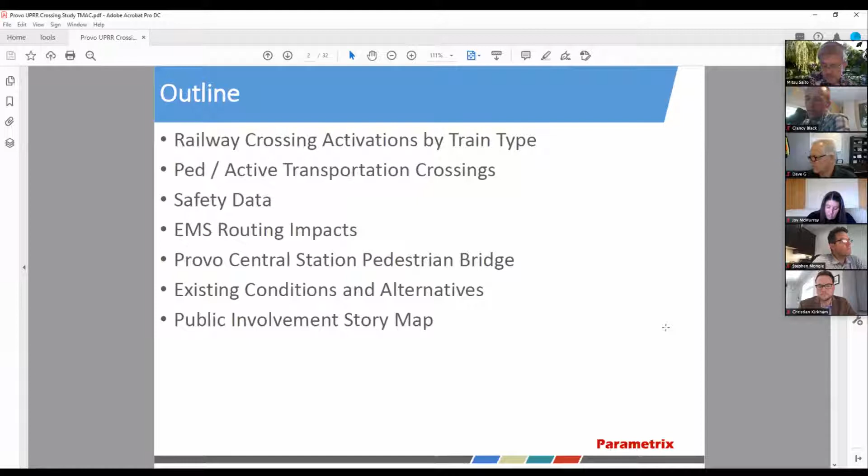So what we're going to do here is turn the time over to Christian Kirkham to talk about the next 6 slides.

Great, thank you, Vern. Good afternoon, everyone. My name is Christian, I'm a planner with Parametrix. I do a lot of GIS analysis. My role on this project was to analyze the observational data at this particular crossing.

So we were looking at Freedom Boulevard and roughly 600 South, right at the railroad crossing, over the course of a little less than a week, but at 2 different months. One set of observations was in August 2019, right before school was in session. The second was in September 2019, right after BYU had started. We wanted to capture both before and after, since there's obviously different traffic and pedestrian patterns that emerge once school has started.

So this first slide we're looking at, we tallied up the number of railway activations - that's when the crossing arms come down. We wanted to get a sense of how many times a day, on average, those crossings were activated. The pie chart on your left, in blue, shows that UTA - the front runner trains - take up the vast majority of activations. Front runner crosses frequently during the day. Next up was the freight trains, and then Amtrak passenger rail made up the smallest percentage.

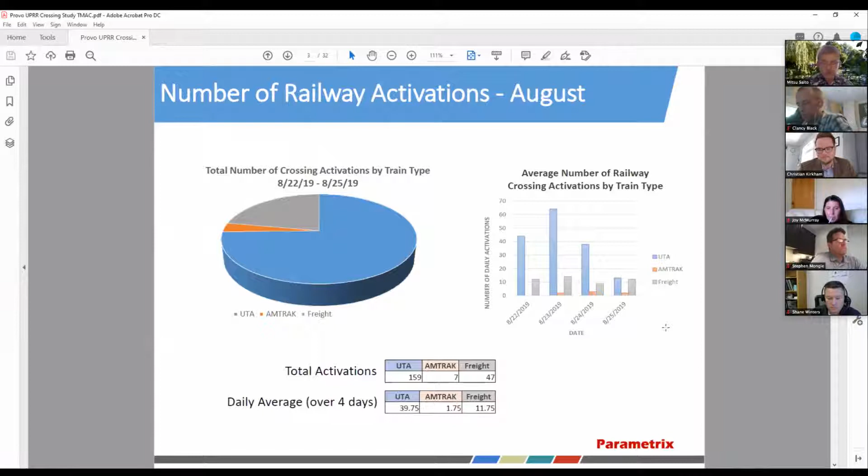Okay, so for September, you can see the breakdown is very similar as far as which type of train was activating the most - UTA front runner by far the most. Our study period in September started on a Wednesday, the 4th, the day after school began. On the bar chart, Wednesday, Thursday, Friday show quite a few activations, and then it dips. On Sunday, the 8th, there are very few activations since front runner doesn't run on Sunday. But overall a very similar breakdown as far as numbers - I don't think the scheduling changes very much, just a slight increase after school had begun.

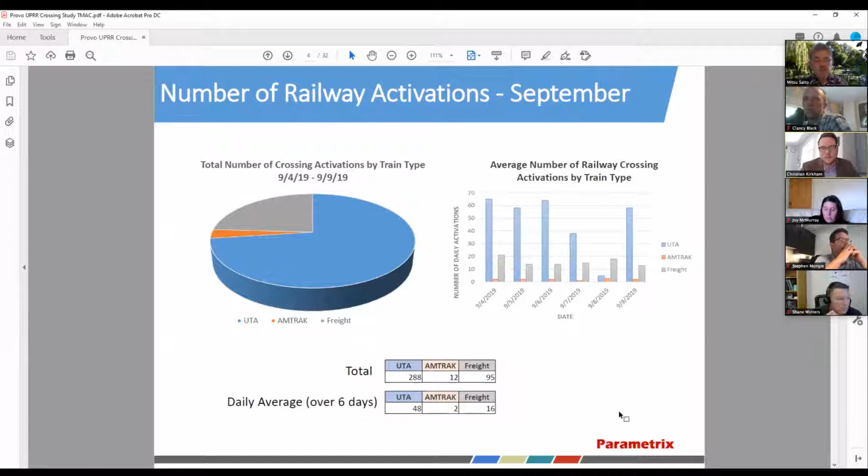Okay, now this shows a different picture - the amount of time those arms are down, by train type. So we saw front runner was frequent, but the activations were pretty brief. The front runner trains that cross are fairly short trains, and then they're done.

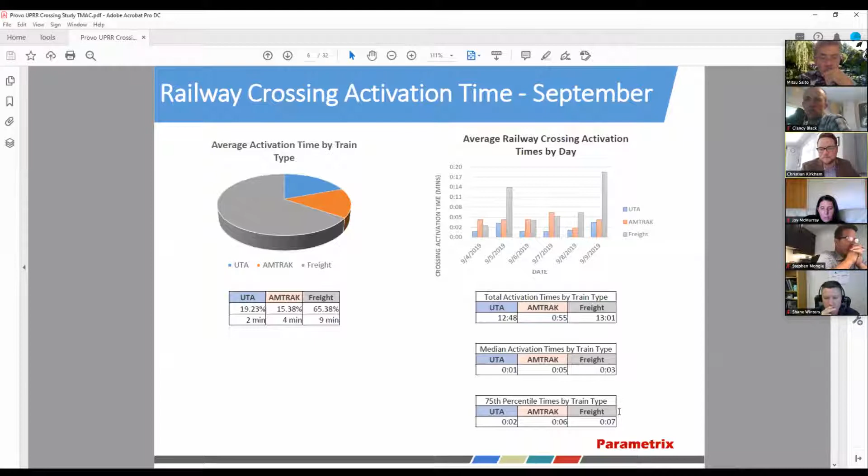Another important part of the equation is pedestrian and bicyclist traffic. Using that same camera and same observational periods, we looked at the number of passengers going to and from the train platform, crossing those crossing arms, and bicyclists. It was no surprise that pedestrians far outnumber the cyclists. We also counted electronic scooters, skateboarders, and people using other modes of transportation. Roughly a third more pedestrians were observed than those cycling.

We observed the peak hours where the largest number of people were crossing. During the weekday, those tended to be the afternoon, the PM peak of 5 to 6 p.m. On the weekends, that would change from early afternoon—we see on the 24th that afternoon seemed to be the peak, on that Saturday.

Keep going, Vern. Christian, could we go back for just a second? Sure, yeah. Please, stop me with any questions.

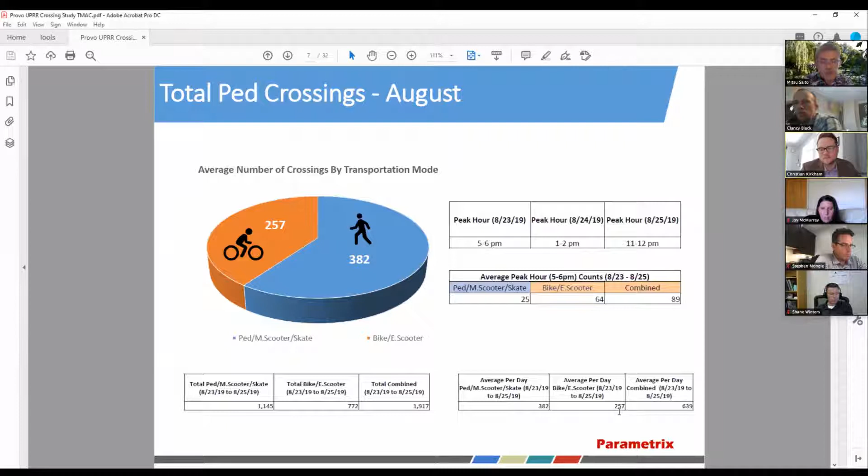After school was in session, the numbers increase, but the breakdown relatively stays the same. You can see September 4th through the 6th, that's during the week, the peak hour was always 5 to 6 p.m. That changes a little bit over the weekend, but we can expect the peak hour for weekday pedestrian and bicyclist traffic to be that afternoon peak.

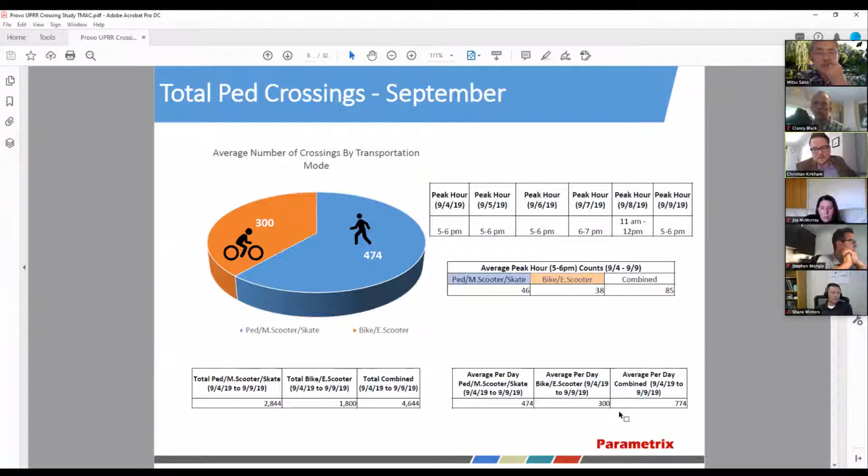I think that's it. Want to go ahead one more, Vern? Yeah, I think this was your...

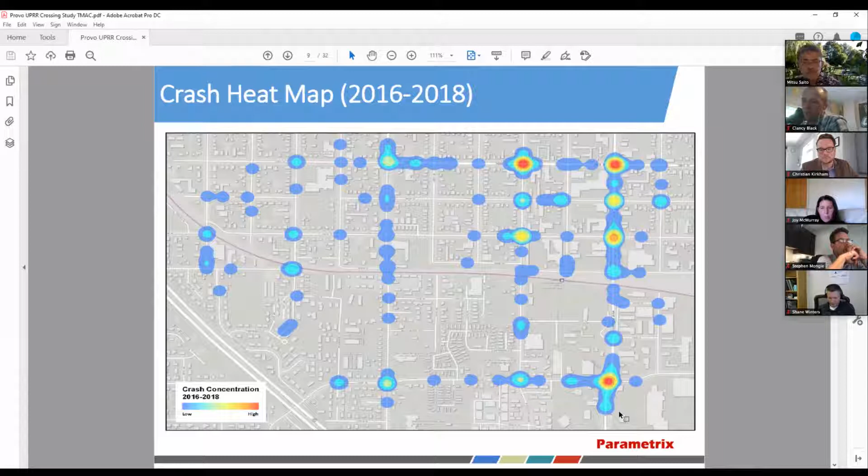This does not include vehicle-train collisions or train-pedestrian collisions—that's a different story altogether. You'll see that our crash severity in the area is pretty low, in the sense that we have a lot of no-injury crashes. We have some minor, and we have a fatal. In fact, on the next couple slides you'll see we had a fatal bicyclist incident as well. That's just tragic—these fatalities in an area spread throughout the community, and people know the person. It's not just a number, and I think that's what we need to understand.

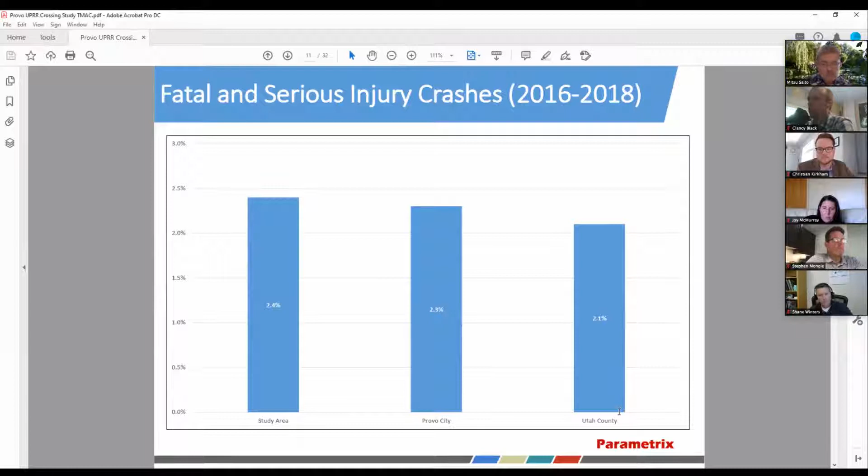We took the crash rate in the area and compared it to Provo City and Utah County in general. It's not a surprise that in the study area, with 2 or 3 major streets like 3rd South, University Avenue, and Freedom Boulevard, we might have just a hair higher crash rate compared to the overall city or county.

Here are our fatal and serious injury crashes. I'm using my mouse down here on 920 South, circling the red one there—that was a bicyclist fatality incident. I don't know the particulars on that.

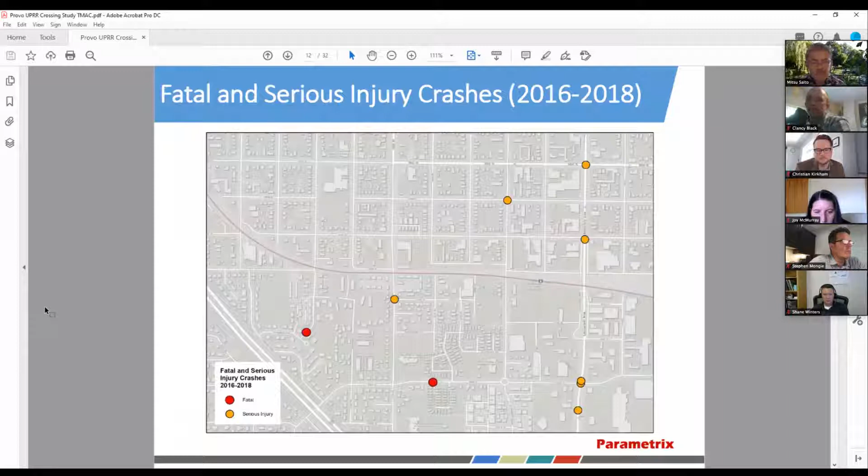Here you can see the bike ped crashes. This was all crashes, all fatal and serious injury crashes for the 3 years. And then here's the bike ped crashes only.

This helps the city and helps us take a look at, well, there's not a lot of crashes at the crossings per se, but we get a lot of crashes when it comes to bike ped at intersections. Intersections is usually the key, and there's just so much going on at the intersections.

We continually ask ourselves, what is a better design? What is causing it, what is the root of these incidents? A lot of times, as Clancy would know, 94 or 96% of all collisions are due to driver error, not roadway design.

So it's unfortunate, but what can we do to design things safer, to force people, if you will, to pay attention? And it's hard. Front Runner and railroads try to do that with the maze before you cross the crossing, and we get them walking each direction down the track, but they're not looking down the tracks, they're looking down at their phone.

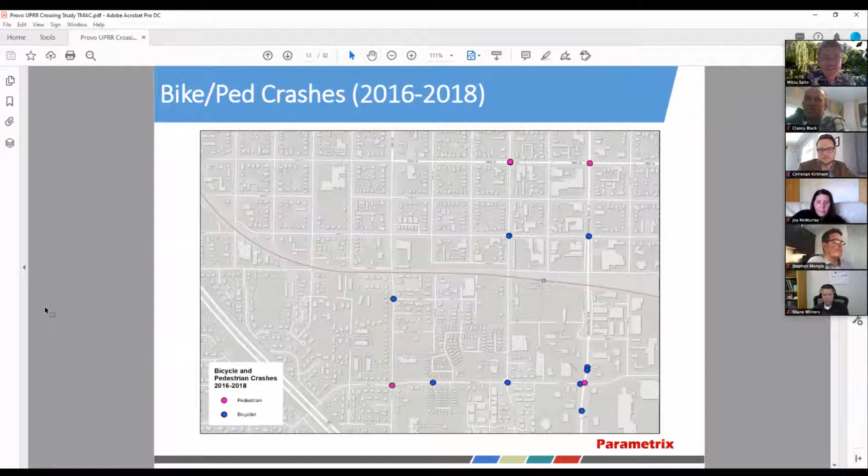So that's our safety information. Any comments or questions on safety before we move on to emergency service routing?

We picked 2 locations to look at emergency service responses and routing. We picked Franklin Elementary School, located north of the railroad corridor, and Franklin Park, south of the railroad corridor, where a lot of activity goes on, including a couple of soccer fields. We wanted to provide a sample of response times to both locations to get an idea of the impact of activations.

The red lines you're going to see are the ones that have an activation that has occurred, and the blue line is their normal route to it, where there's no activation occurring.

We spoke with all 5 fire and rescue stations and interviewed firefighters on that particular shift, and really got some great information from them.

Fire Station 4 is the primary response fire station for this locale, which was a little bit surprising to me, considering it's west of I-15. But that's what it is. Fire Station 4 is located at 2050 West, just south of Center Street, which is the extension of Geneva Road.

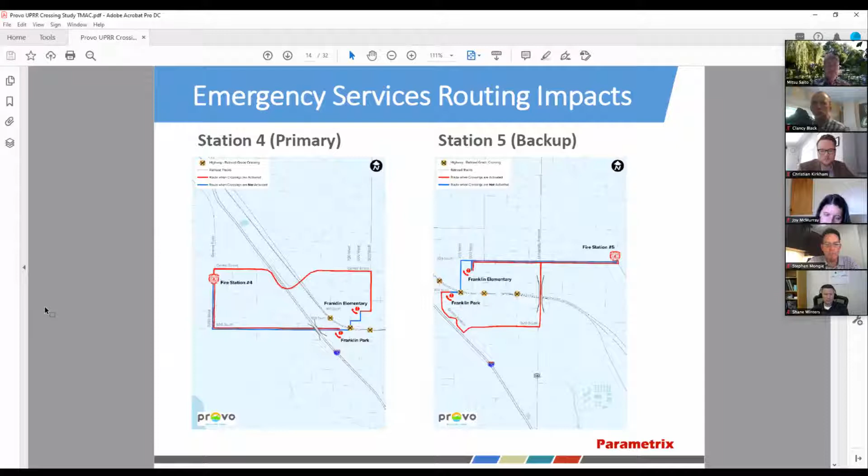Franklin Elementary, of course, is very easy to access. We also looked at Station 1, up where Robert is sitting, and stations 2 and 3. Station 2 is up on Canyon Road, and Station 3 is just off of Columbia Lane. We looked at response times for all of these.

At the end of the day, when there's an activation, you could see stations prolonged in their timing to respond to a call anywhere from 30 seconds to 5.5 minutes longer. That's pretty important when you're dealing with minutes, and you're talking 3, 4, or 5.5 minutes longer for an ambulance or fire truck to respond to an incident. That's kind of impactful in my mind on these activations. Pretty impactful, actually.

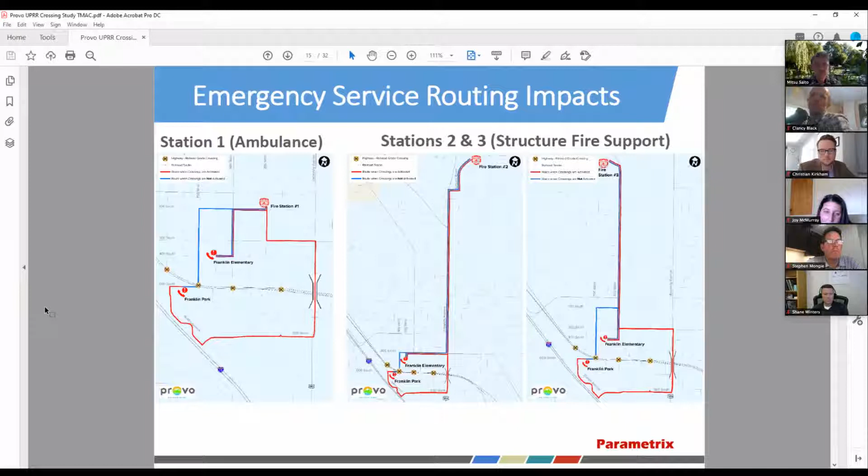So in all, when we look at Franklin Elementary, station 4 is the primary, and 5 is the backup. Station 3 can actually get there faster depending on traffic signals and whatnot. We did a comparison of 5 p.m. and 5 a.m. 5 a.m. is kind of the free flow traffic conditions where you really don't have much backup at all, and you can get there. 5 p.m. is peak hour traffic, of course. So Franklin Elementary is one of those that is not a huge concern.

Detours can take two-thirds of a mile and on average 2.5 to almost 3 minutes longer, depending on the station. Backup from stations 1, 2, 3, and 5 are delayed anywhere from 2.5 to 5.5 minutes, depending on the routes they take. We compared no congestion with congestion, and that's how we came up with this delay.

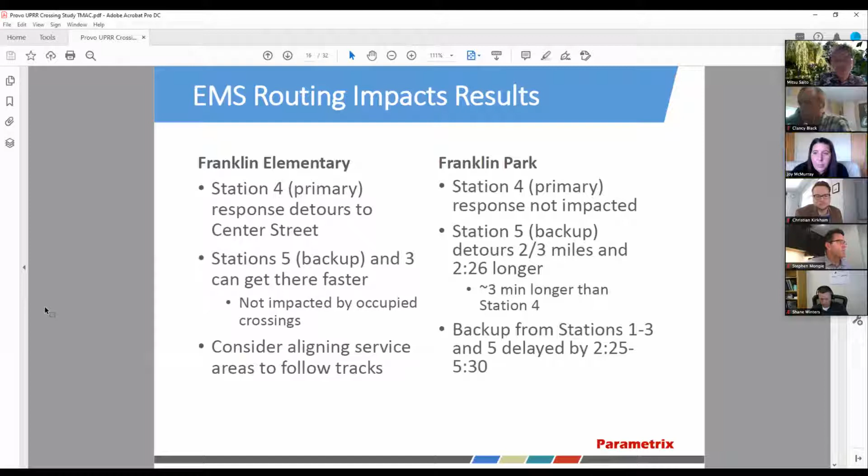Yeah, thanks, Vern. I have a question. Did you say the firefighters have a way of knowing when there's an activation happening? Do they have a camera there, or do they not know until they show up? Yeah, you're correct, they don't know until they show up. They have no idea if a train's going to be blocking their crossing right when they're called out.

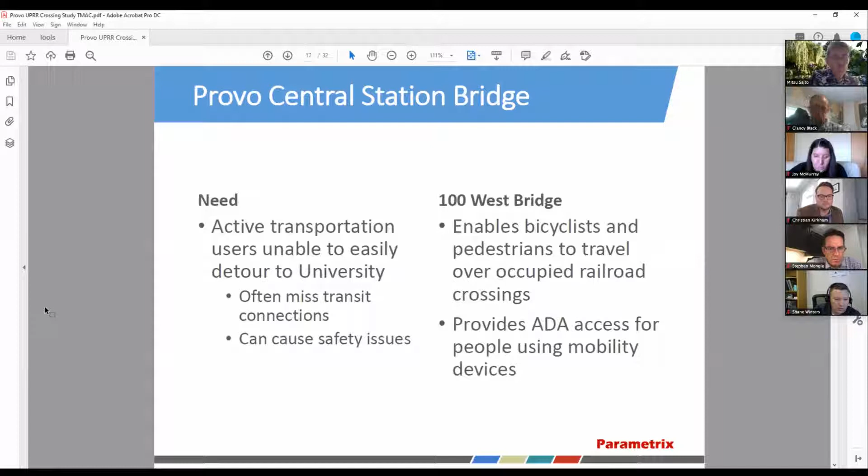So one of the things we've seen, and you'll see this from the video we're going to show you, is that the Provo Central Station Bridge is something we need yesterday. It's needed now for pedestrians, bicyclists, ADA access, and all that. We believe there's justification for pedestrian access over the railroad crossing to access not only the FrontRunner train, but also the different bus routes, and of course BRT with UVX there. All that is important to access.

And here's what a concept might look like. It kind of lines up right on the east side of 100 West Street. It comes down, the landing is just right there across the platform, right where the circular occurs, where the buses pull in. So that would be a conceptual

UTA has a couple of these. One is very similar to this, up there in Farmington, an overstructure like this one. UTA also has a concrete structure at Thanksgiving Point that goes under the tracks. So in this case, we would be recommending an overpass to get to this central station.

So Vern, let me follow up with that one. Yes, that is actually under design right now. It is funded, so as soon as we finish design, it'll move forward on construction. Over the next year and a half, design will finish and construction will move forward. So that is happening and moving forward.

And if I remember correctly, Shane, some of the data from this analysis was used to obtain some grant funding to fund the remainder of this bridge. Yes, we did have a shortfall, and we did get some additional funds from our CDBG funds. Great, thank you Shane for that update.

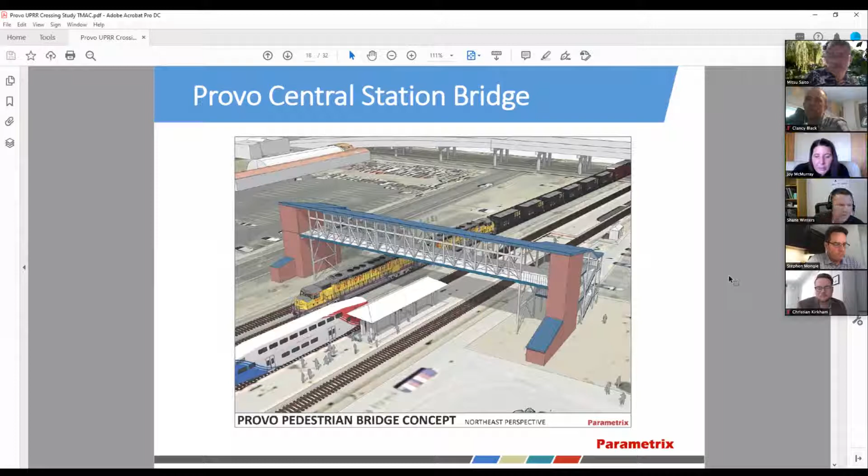Okay, moving on to alternatives. What we looked at is 3 alternatives. We looked at a grade separated crossing at 500 West and at-grade at Freedom Boulevard. And then we switched those around for alternative 2. We looked at it at-grade at 500 West with a grade separation at Freedom. And then finally alternative 3, which is what is consistent with the Mountain Land Association of Governments Long Range Regional Transportation Plan, is grade separated at both Freedom Boulevard and 500 West.

So I'm just going to briefly go and show you the conditions that we see when taking a look. We flew a drone, we're going to show you a video of that here in a minute. But all our VISSIM analysis, which is really travel modeling in a very specific area, we created our VISSIM model to project and calibrate our models with existing and then 2050 conditions.

And so here's what happens existing. You guys know this, you live in Provo. You know what happens when there's an extended freight crossing. By the way, the average is 7.5 minutes. So a lot of this data that we're going to show you for an average freight train is 7.5 minutes. Trains are getting longer, not shorter. The frequency is staying about the same, it might be a hair less, 1 or 2 fewer trains per day. But Union Pacific, there are 3 freight trains that cross this track.

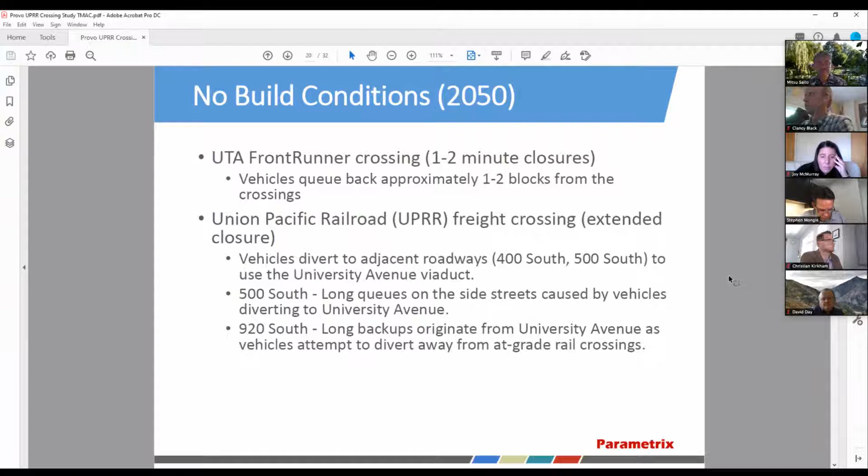So alternative 1, where what we see is 500 West flows pretty freely, obviously with a grade separation there. We have fewer backups on 4th and 5th because now the drivers at Freedom Boulevard have an opportunity to go east or west to access a railroad grade separated crossing. And then the queues on 920 South, there's some queues that remain, but not as bad. And so Freedom Boulevard's not quite as bad, but they are diverting to both 5th and University Avenue still.

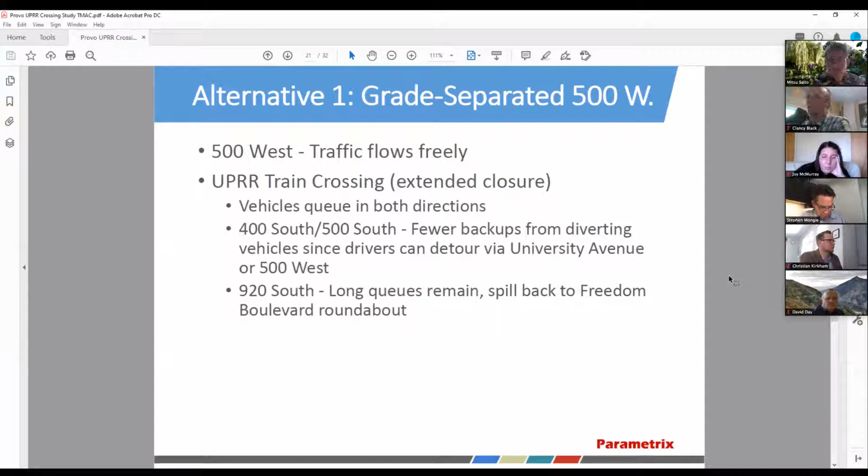On alternative 2, you get our typical stuff on UTA Frontrunner, but when we experience a freight crossing, traffic's going to be smooth over Freedom Boulevard because we got the grade separation there. But then what we experience is kind of just push the bubble.

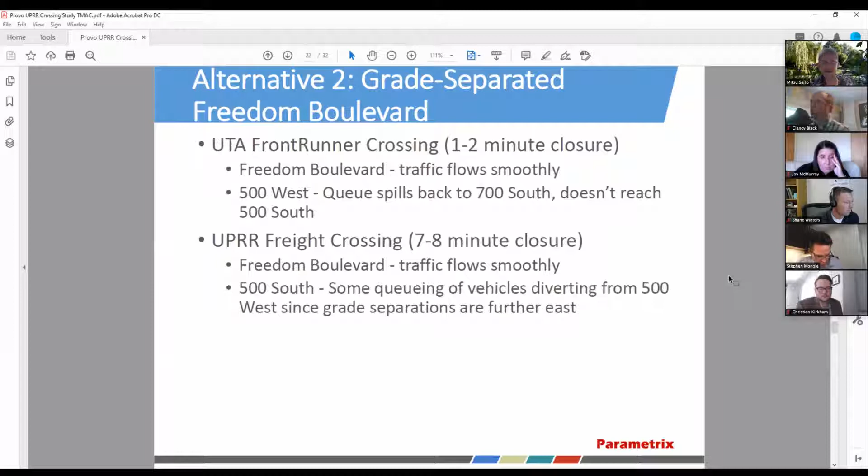We're experiencing delays on 500 South from 500 West, trying to get over to Freedom Boulevard, and you'll see some of this in the video as well. Alternative 3, there's no delays, right? There's just no delays because we got grade separated at University, we got a grade separated at Freedom, we got a grade separated at 500 West, and all these would have the current design of the bike ped bridge to the station as well.

So here's the real big story on this. MAG has their grade separated crossings both in phase 1 of the regional transportation plan. The outcome of this study is, A, we confirm through our analysis that grade separations in the Mountainland RTP are needed. However, there's an order, and we're probably recommending a little bit different timing for the second one. So let me just walk you through this.

Existing conditions, now this is just for 1 hour, PM peak hour. Let's say we have a Union Pacific freight train that goes by and takes 7.5 minutes. We're going to see a detour of 164 vehicles. This is today. And they're going to detour 109 miles out of their way, and 4.5 hours of additional travel time.

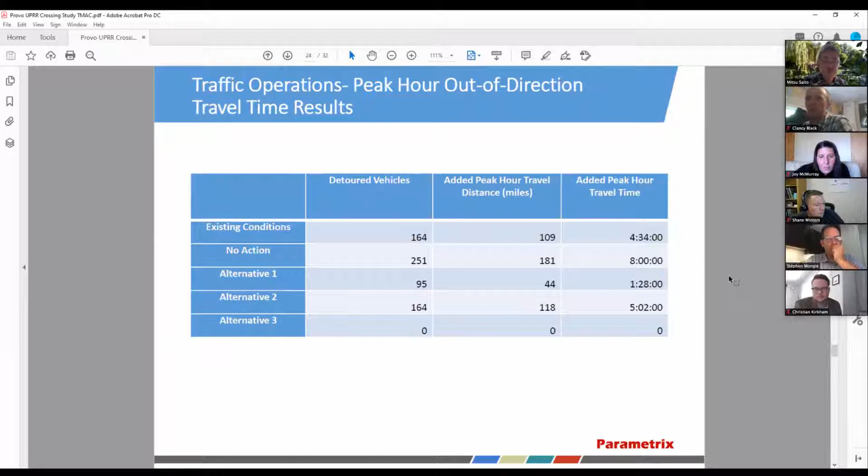So with that, I can take a couple questions, but I know what you really want to see is the video, right? So what I'm going to do is bring up a video and show you this. This is what we're going to go public with. Can you still see my screen?

Yep, okay, you should see what is called the Provo Railroad Crossing Open House. It's a story. On January 30th, we were able to hold an in-person meeting citywide and get people's thoughts about the study. So what we have here is an introduction to the study.

Vern, yes, Vern, we see page 24 of your PDF still. Did you change to something else? Oh yes, I changed it. Hang on, let's see how we can get this one up.

I'm going to share a different screen. How's that work?

Yeah, that's great. Okay, so because of COVID, we need to go back out to the public and show them our findings. We're going to place a link on the Provo City website, work with the mayor's office and department heads to promote this, and also put it on the Public Works Engineering Division webpage. This will go through the study, which has an introduction and existing conditions section, which is what I'd like to get to.

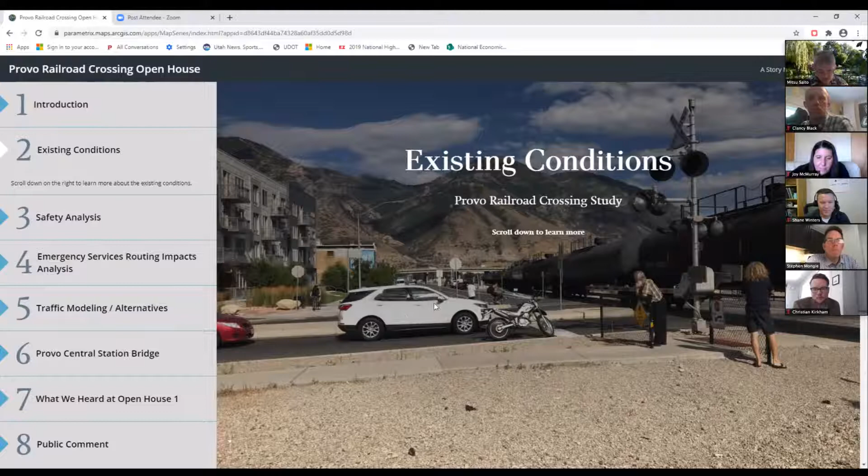Now you're going to see a picture here. On this particular day, you see this motorcyclist parked his motorcycle, and a bicyclist over here. What you don't see behind this car is about 2 or 3 people sitting down at this island - they missed their 5 o'clock train and their 5:30 train.

I was in a hard hat and a vest, and they thought I was with the railroad, so they came over loaded for bear. They came over and talked to me, and I said, no, I'm not with the railroad, but that's what we're looking at right now.

This guy was a Nu Skin employee, very well dressed, and he says he takes the train every day, and once a week this happens to him - he misses a train at least once a week. He's commuting from the north down to Provo and then walks to his office, which is awesome, right? We want more of that. But when transit is unreliable, people get impatient and go back to their automobiles or other methods. I wanted to point that out to you.

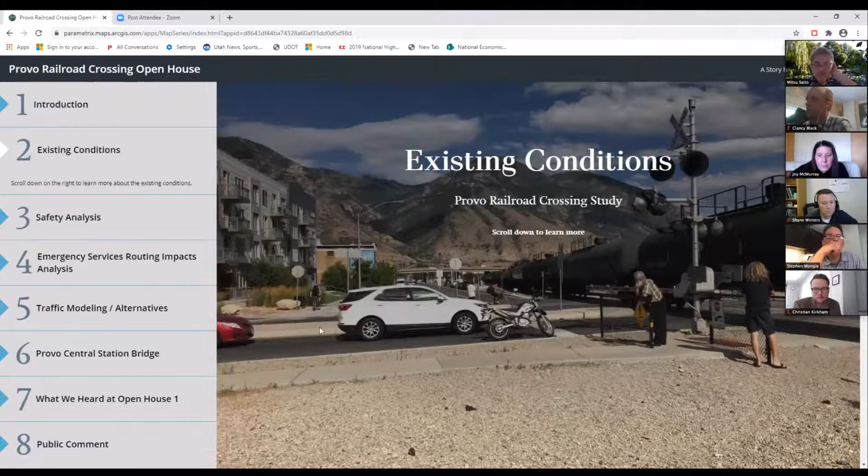Let me go ahead and show this part right here, and I'm going to pull this aside and blow this up. I'm going to try to walk you through a little bit of this.

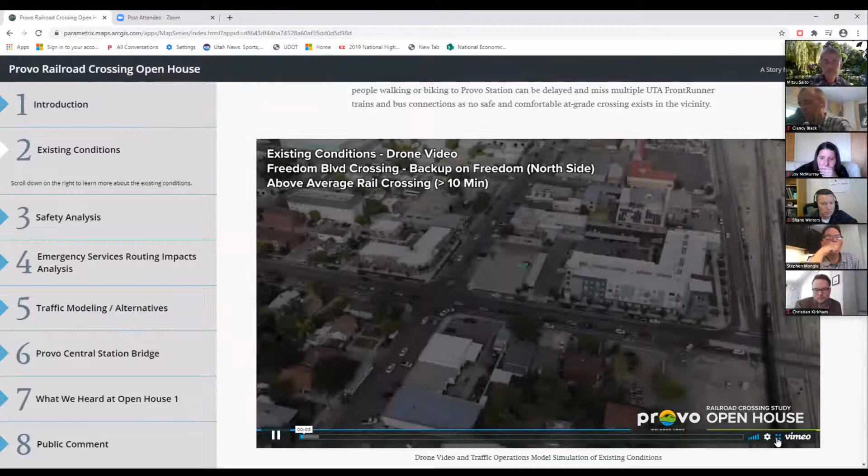This is a freight train that has just gone by. We got drone footage video here. You can see it's backed up 1.5 blocks on Freedom Boulevard to the north. These are southbound vehicles, you're seeing this, right? Notice 4th and 5th South - there's a full block backup on both of those, trying to make a right turn onto University Avenue.

So this is a railroad crossing delay, and then take a look at northbound on Freedom Boulevard, where we have all these vehicles waiting to go northbound. It's blocked up, backed up 1.25 blocks.

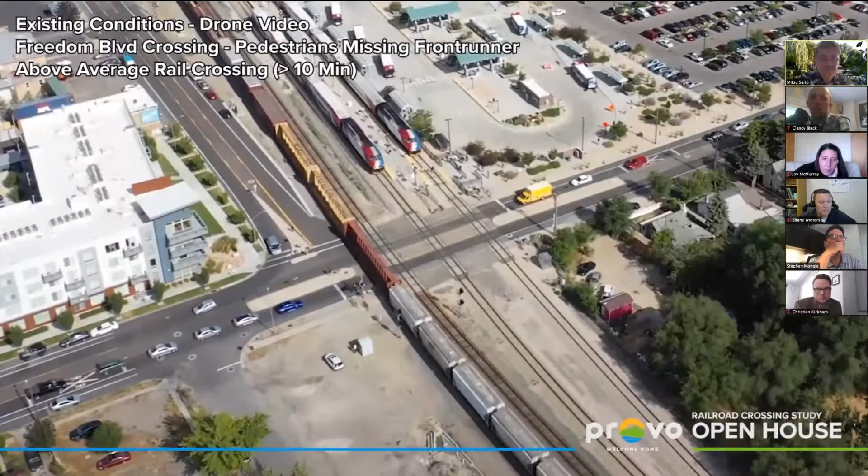So it's not uncommon for us to see a multiple activation event where we have a freight train and a UTA vehicle. Here's the guys sitting over there on the islands who have missed their trains.

It's frustrating because the only detour they have is to walk all the way over to University Avenue, take the viaduct. They would walk about 6 blocks out of their way - and these are not short blocks either - just to get back to where they need to be.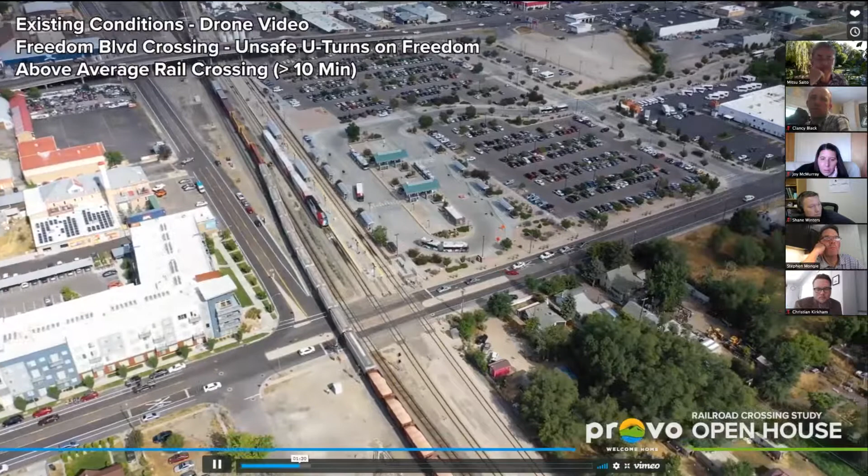Now you're going to see some people see the train and they're making U-turns, making maneuvers that could result in accidents. This poor bus sat there for 30 minutes that day. They have no option - they're not going to be able to back up, they need to stay on route. That poor bus sat there for 30 minutes during this railroad crossing delay on this particular day.

We went down 2 or 3 different times and took drone footage video. I have some contacts with the railroad, and they would tell me when they had some trains leaving that afternoon, and we'd go down there and do the drone footage.

Again, showing this - it's a little slow here, but I'm not going to show you the whole 9-minute video. You'll be able to get onto this and go look at it. See, there's a car doing a U-turn. Most of these cars eventually turn around because it's just such a long wait.

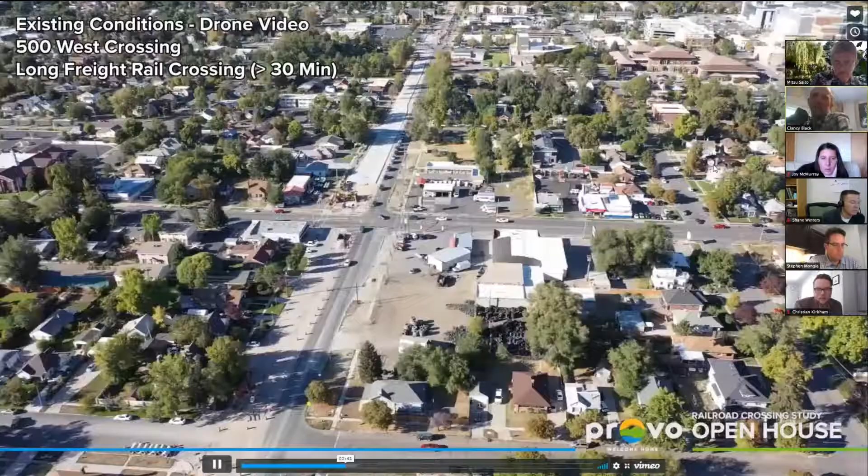You see a lot of cars on the north side using the two-way left turn lane to go past the queue to their access as well. That last video, yeah, they do. They know because they live off of 5th West.

So what I'd like to get to is seeing us, here's 920. Take a look at 920 South to the left of the roundabout. See how far that left turn lane is backed up? Now we sped up the video just a little bit.

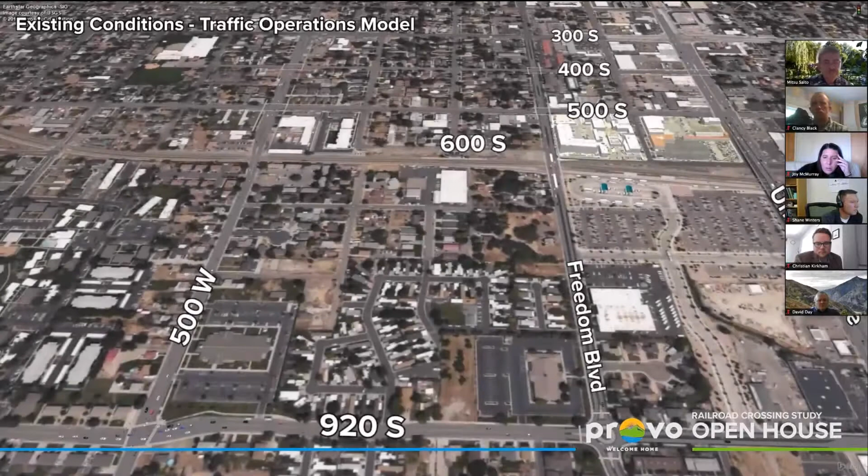So this is what happens when the train traffic, and they're operating on a new operating system, a new concept called precision scheduled railroading. This concept's been around in other railroads for many years. Union Pacific implemented it about 1.5 to 2 years ago. What it really is, instead of concentrating on moving trains, they're concentrating on moving rail cars. And what that dictates them to do is switch on the main line. You have 2 main lines in Provo, Main 1 and Main 2, not to mention Utah Transit Authority's FrontRunner line. Now here's the travel model that we built with Vissim.

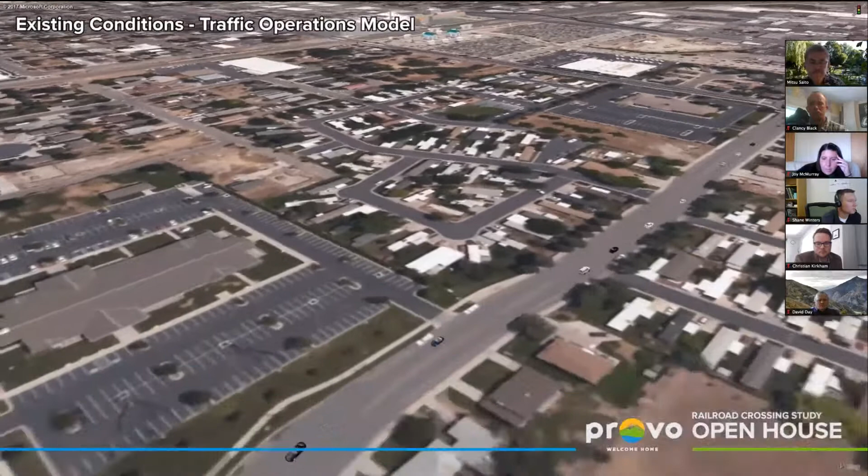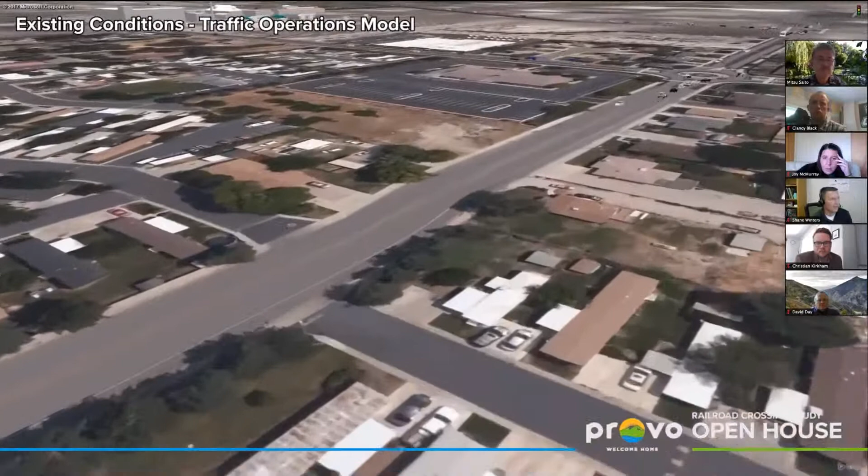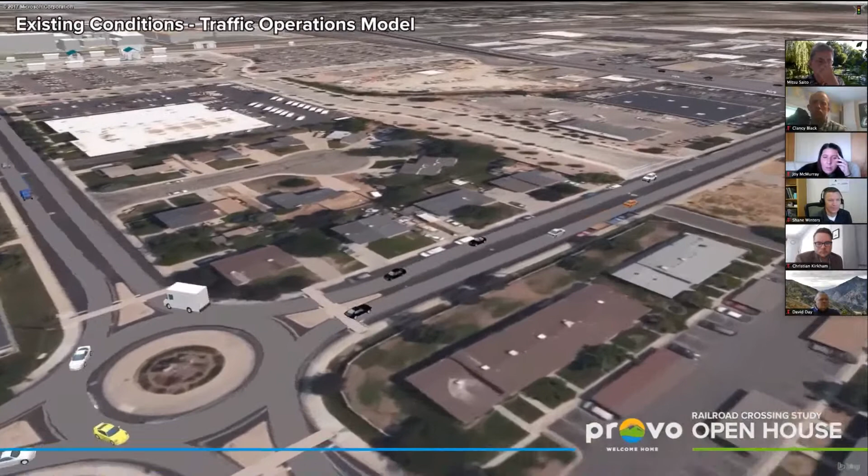I'm just going to show you a little bit of this so you can see our model and how it works. We based our model off of existing drone footage conditions on different events. So if it was a shorter event, like 7.5 minutes, or if it was a longer event, we saw trains blocking the crossing 30, 45, an hour and 15 minutes during either August or September when we did this.

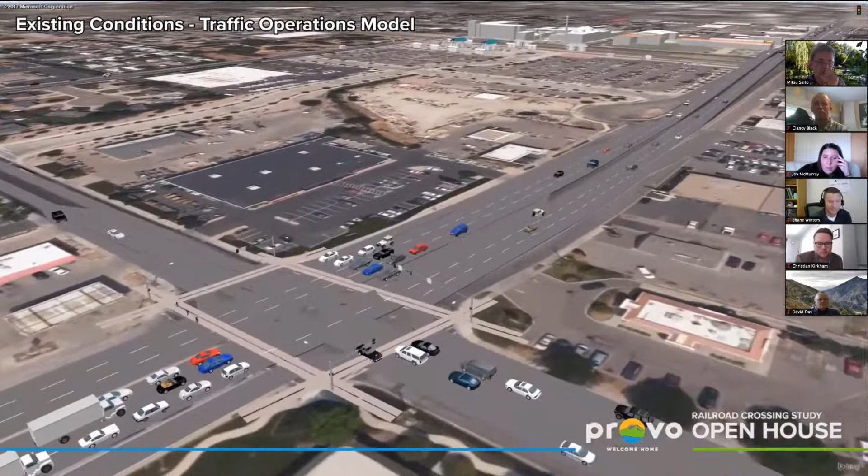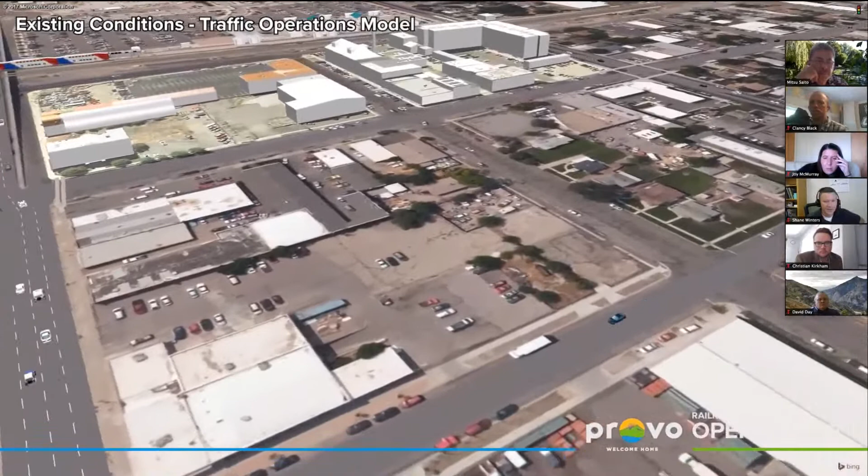Notice the left turns onto University Avenue from 920 South, going up over the overpass. We're going to come back down, work ourselves over to Freedom Boulevard. We get a lot of left turns onto that, right at 5th and 4th, or at least if they can make it. Sometimes it's pretty challenging. Here's Freedom Boulevard as they come down.

And so this is our model that we built. You can see FrontRunner there. And now you see a Union Pacific train that is going to activate the crossing. And what we're going to experience is just what you saw in the drone video.

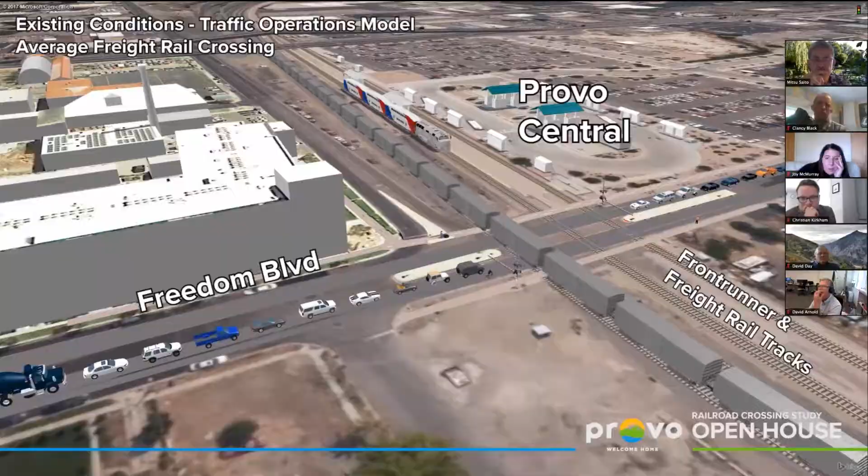Bikes and pedestrians will often walk up right to the automatic gates and the stop line. Unfortunately, if they're on the south side of the tracks, they don't wait a lot of times. They'll go ahead and go up past the first 2 tracks and wait, and that's really dangerous behavior because we could have 2 FrontRunner trains, one leaving and one coming in at the same time, and they're technically in the crossing and they shouldn't be. But we see that observed in real footage that occurred with the drone videos.

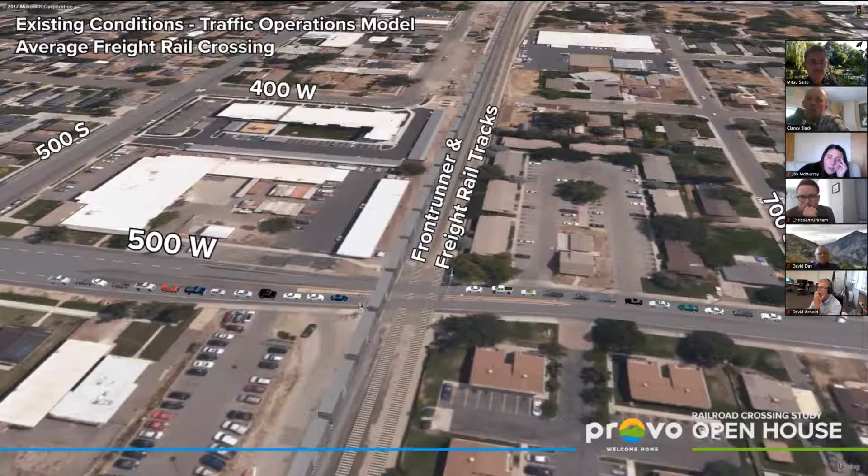Here we are over at 500 West. You're seeing the backup starting to occur on a regular 7.5 minute freight train. I know it's a little slow, so I'll end there. You can watch these at your own leisure. Let me go back and minimize this now and kind of get back.

Oh, this is actually going to be a good part. Am I still sharing? Mm-hmm.

Okay, watch this. See the pedestrians there on the south side? That's realistically what happens. Here we go. As soon as the train passes, they go instead of waiting until the lights completely stop flashing and the automatic gates come up. Now that they're coming up, the traffic again begins to move.

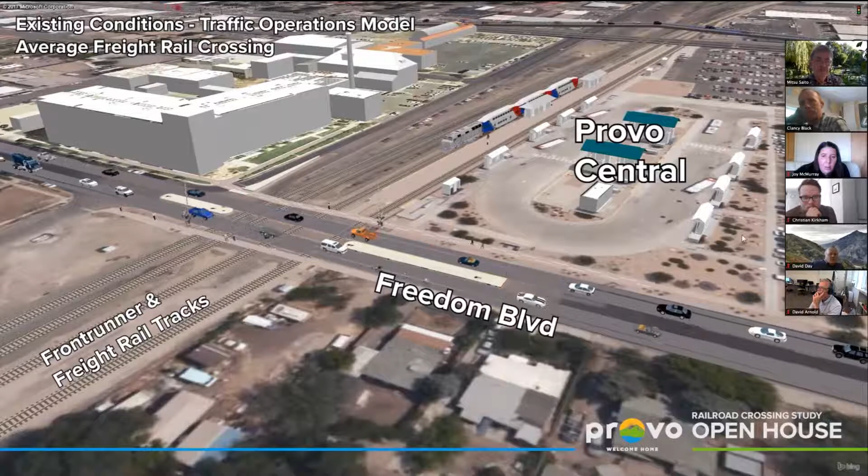Apologize about that. Do you have a future model? I mean, assuming, let's say, those 2 bridges are completed, have you made the simulation for those cases? Yes, for alternative 1, 2, and 3, they're also on there.

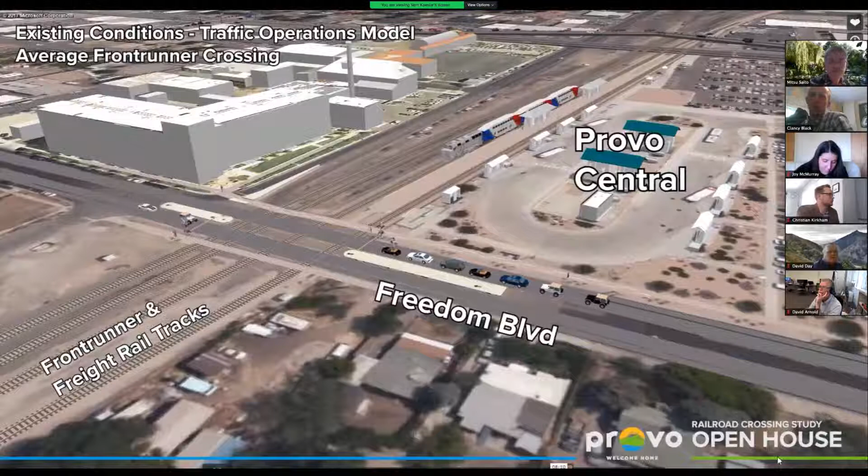Okay, let me show you. See, I stopped sharing real quick. Let me share screen and go back to this, and let me exit out of this part to show you the rest of the website. So there's safety, you can see that, the emergency service routing. And here's where, number 5, Mitsu, you can scroll down and see all the alternatives 1, 2, and 3 and what it does, okay? Great, thanks.

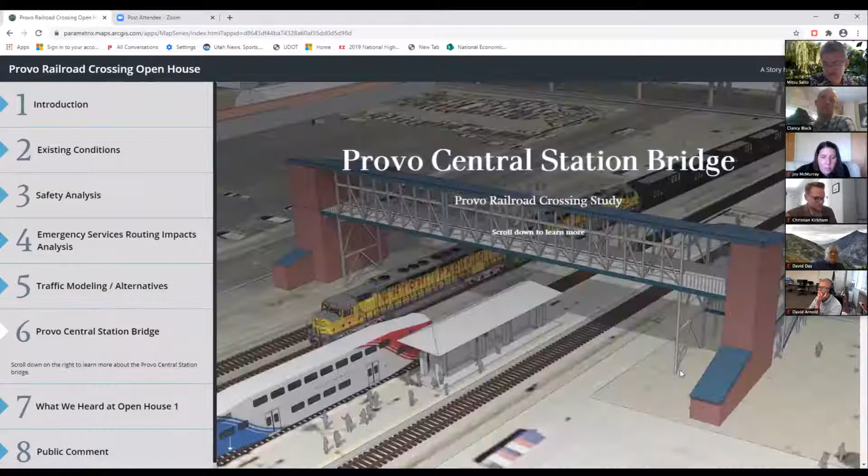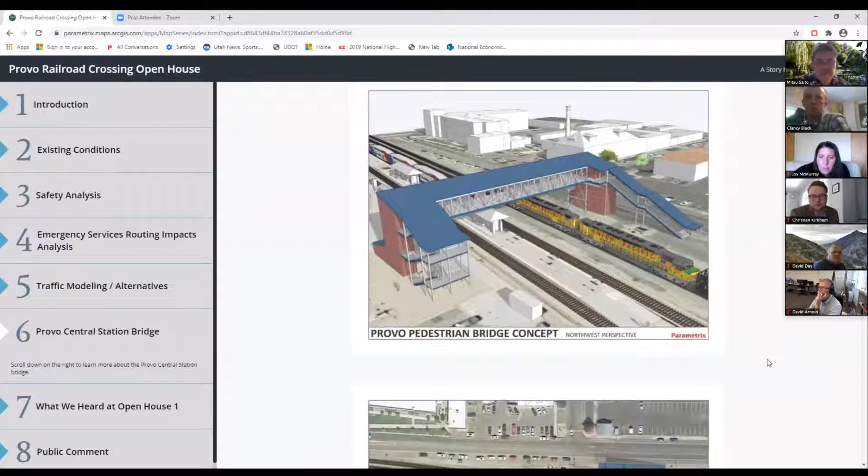Here's the Provo Central Station. Here's another look at it. And I think we actually provided some information and another graphic from the other side, if you will, and you kind of see how that looks. Again, conceptual, but kind of gives you a plan view orientation. As Shane said, the actual design, because of the railroad property and right-of-way, might shift a little bit to the east.

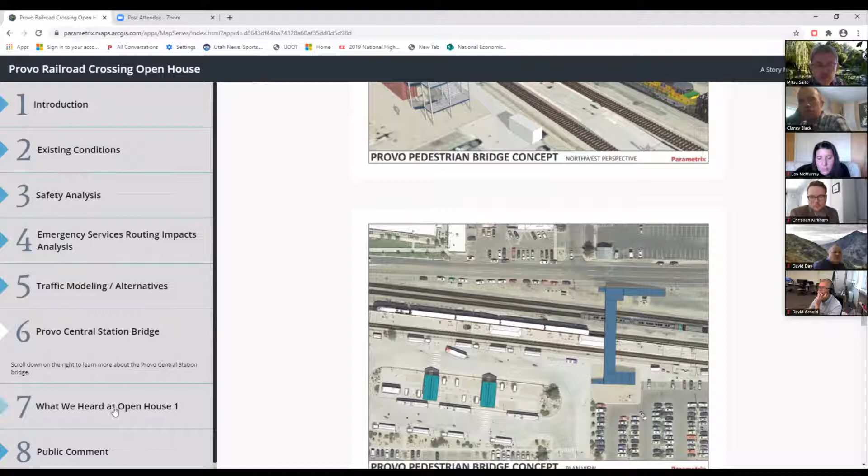And then what we heard from the first public open house, there's the comments for you to read. And then you can go in and provide public comment yourself right here. So this is kind of how we do public outreach in the COVID era.

That's great, thank you. So is that the next step that'll be provided to the public? Yes, wanted to show you guys first. We just finished that website this week for the story map. Just showed it to Dave and Shane and David last week, working through a couple of comments, and it's about ready to go.

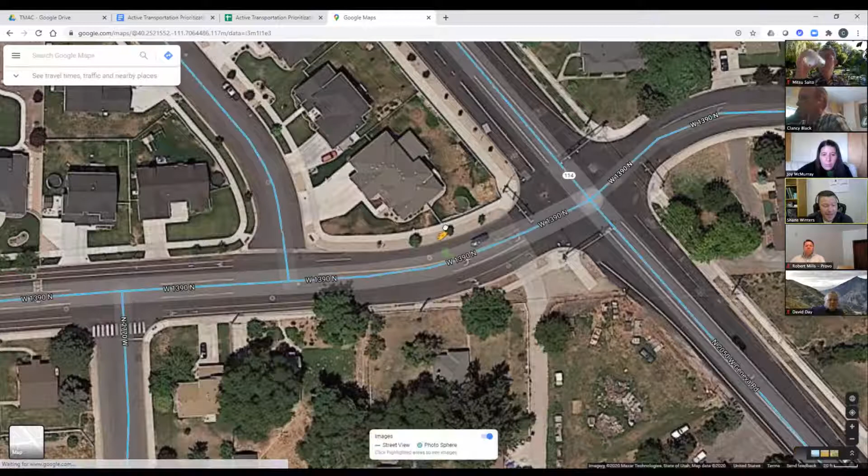Repave this road. We've restriped this road, and as part of that, right around the high school, we did work with the elementary school on the safe routes to school. When we did this and they did the research, I think this was probably not in there, and we have probably already completed this. We've added all those features. So this one might be done.

Yes. Oh, good job, everybody. Yay! Project finished. Yes, and these are the things that we do continuously with our road rehabilitation project. That's why we try to tie those together a lot with projects we have, our road rehab. We start looking at these specific projects and see what we can do to complete them as part of those.

So I believe that one's already done, and that will be 2770 West. That would get you out to Lakeview Parkway, which we're working with Ivory to construct right now through their phase 5 and 6 out by Lakeview, to start getting those portions of Lakeview Parkway built. They already have that road at 1390 all the way built out to Lakeview Parkway. We're going to be building that road north of the school. That'll connect you up right there across, and we'll be building that road up north to there. So that's going on right now.

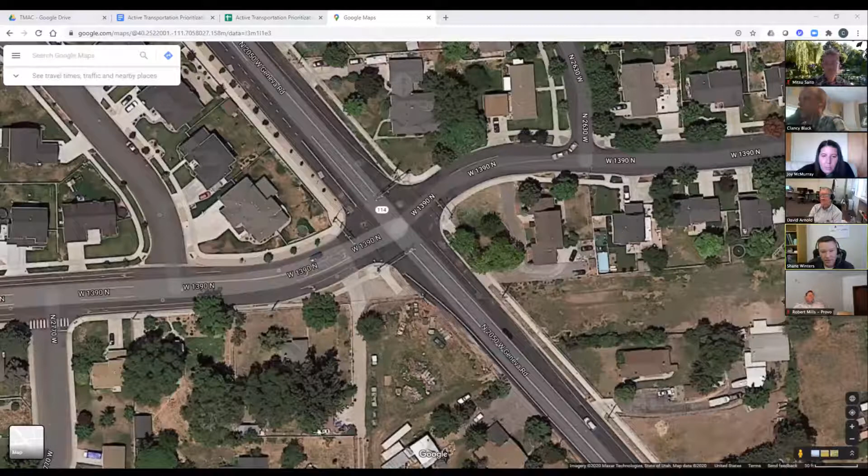That is on phase 1 of the MAG plan, and I know it's on UDOT's higher priority list. They're showing that as a 3-lane road all the way through Provo, from roughly 2000 North all the way down to Center Street. As part of that, there's an environmental document that I believe was completed in 2007 or 8, that shows bike facilities and also a 10-foot or a multi-use path on one side of the street. I can't remember which side that was on - I believe it's on the west. That goes all the way through there. So the state has that in their planning system, and it's also on our 2B active trans project list, so it's covered in both places.

So that would be coordination with the state when they start reconstructing or widening all of Geneva Road. Okay, well that's good. So let's jump on to the next one.

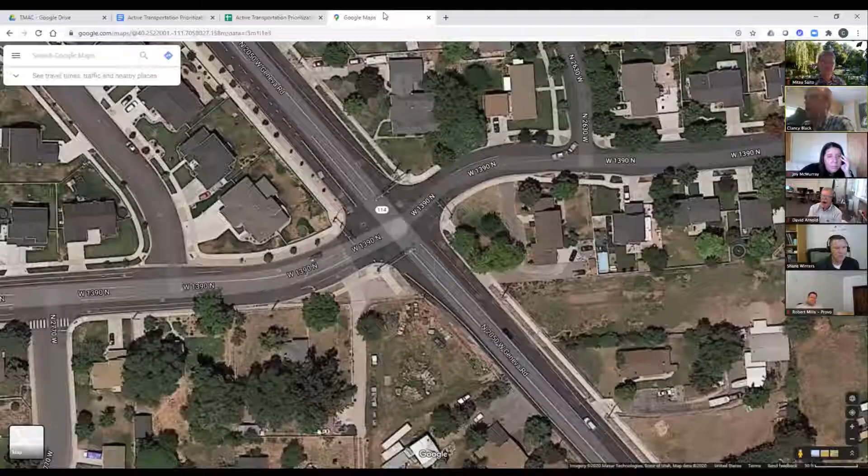2230 North, University Avenue to Parkway Trail. So let me get my bearings. I think this is probably - wait, was that University Avenue? Yeah, probably connecting the river trail here where it ends over to. So I can talk about this one too, Clancy.

Back in 2014, back with Mayor Curtis, one of the concerns was 2230 North - we have the trail system that runs along University Avenue, roughly, if you get up there. I think it's 3,700 North-ish all the way down to 2230 North. A lot of that trail is adjacent to the road. It doesn't have a good park strip or separation, and there's also a portion of that on the avenue that's only a 6-foot sidewalk all along there. Also along 2230 North, it's a narrow sidewalk. It's identified as part of the trail system that gets you over to the Provo River Park, the Provo River Trail, right there at 300 West.

You can kind of see where the power station is - there's a bridge there that needs to be reconstructed. So initially, through MAG, we had this project funded. There was about $3 million designated back then to do this project. What ended up happening is Bulldog Boulevard, the bike boulevard, now Cougar Boulevard, became a higher priority. So we had MAG funding for that project, but we ended up switching the years on those projects so that we pushed the Cougar Boulevard project as a higher priority. Then the funding for this specific project got delayed until now. So funding has just become available to complete this work. Right now, the Parks Department is taking the lead on that project.

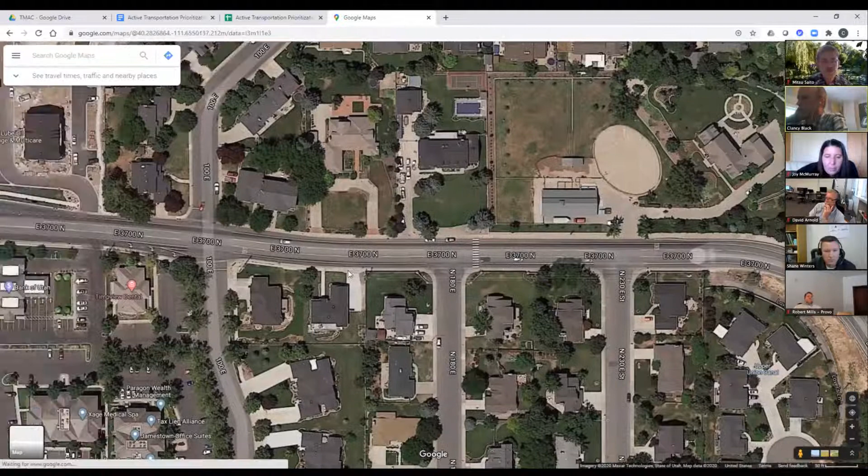All right, 3,700 North, 50 West to 100 East. 3,700 North. Oh yeah, this is another one where it's a small little pinch point. So from here to here, I've ridden this before many times on my bike. There's a pretty comfortable shoulder or bike lane up until this point, and after this point it looks different. So I imagine the intent of this project would be fixing this barrier where it's pretty uncomfortable as a bicyclist, and even pedestrian probably, to get from here to there. I don't know, anyone else, any thoughts on this or background?

Nope. Okay, so let's try and get through this one and maybe one more if we can, just so we can try out our plan here. If we were going to rank this on a 0 to 3 scale, and we may adjust the rating scale as well, where 0 would be no impact, 1 minor positive impact, 2 positive, 3 significant positive impact, how do you all think we would rank it for these categories? So let's start with active transportation mobility. What do y'all think we would want to score this possibly? And this is not the official scoring, we're trying it out right now to learn.

So, this is Jim. I live about a half block away from this site, and it's an issue of considerable consternation to neighbors and people who use the gas station on 3700 North, Will's Pit Stop. There are frequent accidents, there are frequent bicyclists who are trying to cross in this area and nearly get hit. So I think I would put this in a 3 category. I mean, maybe that's because I live in the area and know quite a bit about what the feelings are in the neighborhood about this problem.

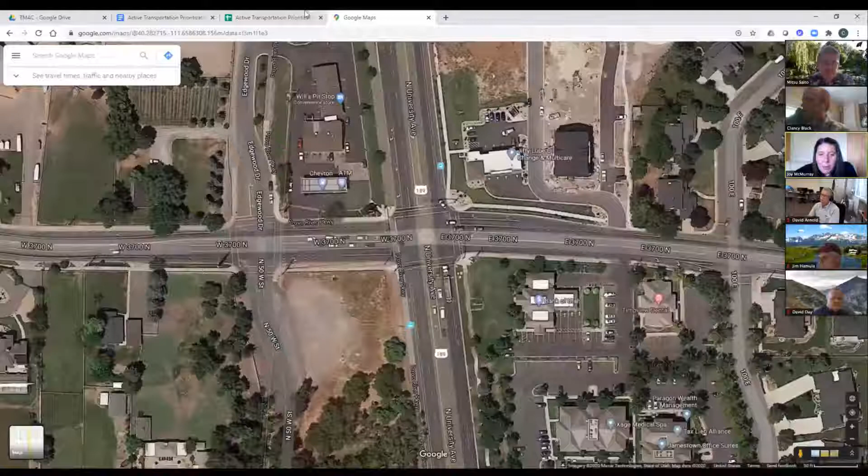Mostly mobility for bicyclists. Do we have a safety category? Because it would score high in safety. Oh, we did, okay. Yeah, if you could have a separate bike path, that'd be nice - it's a good transition from University Avenue to other streets.

On community, I would say 2. Because there's positive impact for all who are driving, walking, and bicycling.

In terms of economic impact, I'd have to say minor - very much more lifestyle than it is affecting a business. The only business there is going to be Will's Pit Stop. So maybe even a 0 or a 1 on economic. Yeah, I would say almost 0.

Next one - it's 2:00. Do we want to hurry and do one more for the sake of conversation, or should we stop? I have to go, but you guys are welcome to continue if you need to. Let's call it, we can continue next time. That was really helpful, we have a better idea. If you could send this Excel file to us, then we can think about it before the next meeting.